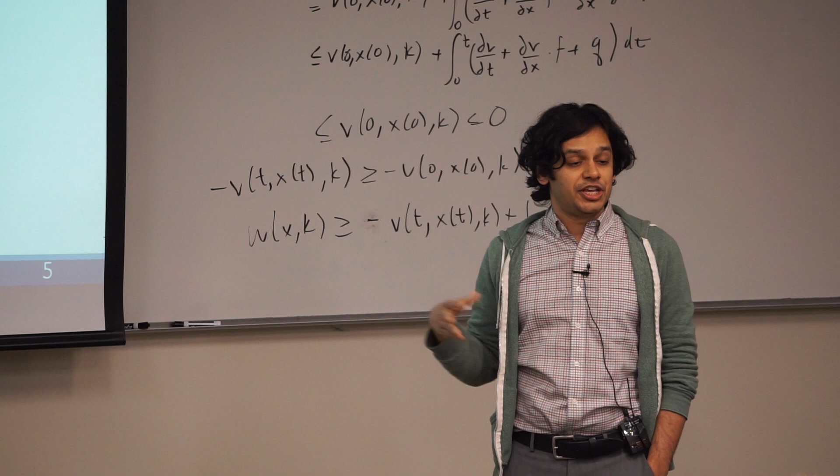We've done a lot of work on building data sets where we perturb people while they're doing real motion. I think this is my student Patrick, and he's walking around. We've attached cables to Patrick and we're perturbing him, seeing how much of a perturbation he can tolerate. We try to understand how stable a person is by using control theoretic concepts like a region of attraction. We've developed techniques that can generate a region of attraction for different types of locomotion.

Recently we've shown that these regions of attraction actually coincide with just how stable someone is. If we perturb them, we can predict what level and type of perturbation corresponds to them having to use a different control strategy. It's been shown in the literature that having to switch arbitrarily between different control strategies typically corresponds to a higher likelihood of falling.

The last thing, and this is an area I hope to get more into, is translating these ideas of region of attraction into actually doing control design for prosthesis and orthotics. We have not done too much exploration here, but it's an area we're looking to get into more and more. The other area that we do lots of work in is the automated and connected vehicles domain.

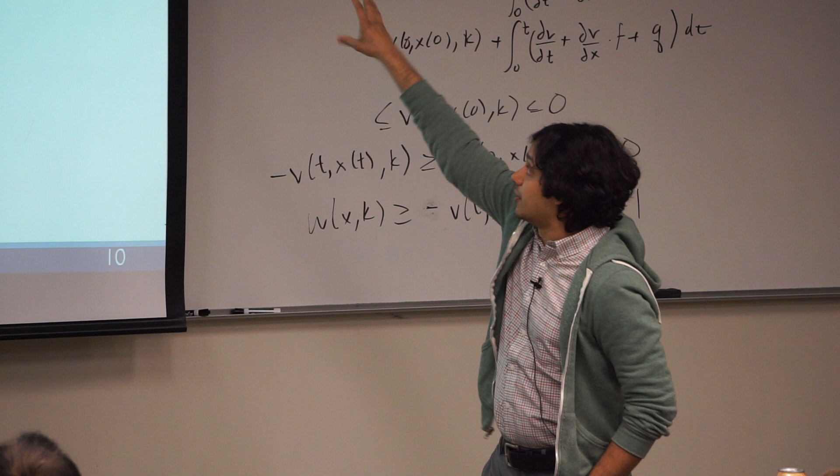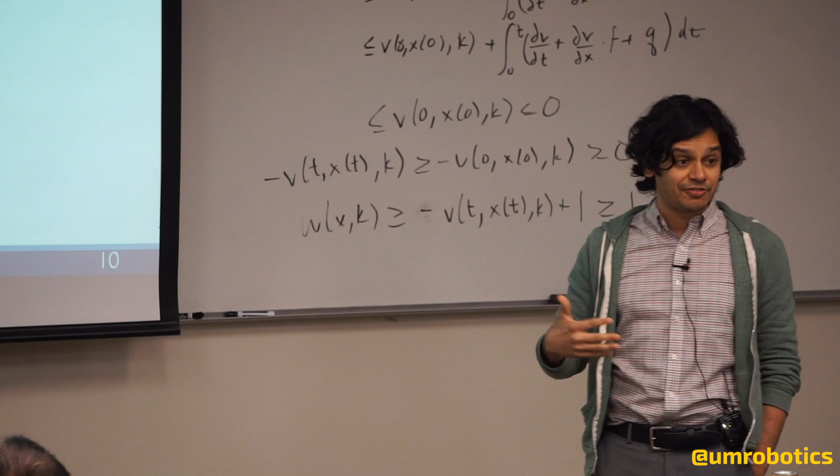The other things we've done is actually look at sort of estimation problems. Typically people think of estimation in automated vehicles and they think of things like SLAM. That's great. One of the things we've actually done is use windshield wipers, for instance, to estimate rainfall rates. And this is with collaborators Matt Bartos and Branko Kerkez and Hyongju Park.

What we've done is shown in Ann Arbor using instrumented vehicles that we can improve the accuracy of rainfall prediction, so much so that we can now try to control water networks and whatnot. My colleague here, Branko Kerkez, can talk about that at great length. It's a really cool way to leverage automated vehicles in a way that people don't nominally think about. So it's really cool work.

And the last thing we think a lot about in my group is actually driving. And Michigan presents a really interesting challenge when it comes to driving.

So you'll notice none of these people up here are actually from Michigan. This is my first time in Michigan. As James said, I came here from Berkeley, and I grew up in Southern California. My first time in Michigan was in Sault Ste. Marie in February in 2011. What we were doing back then was trying to drive this Jag at really high speeds on ice and use MPC to do lane change maneuvers and whatnot. It's really hard. And frankly, it was super cold. They had me standing outside recording this, and I can still remember that.

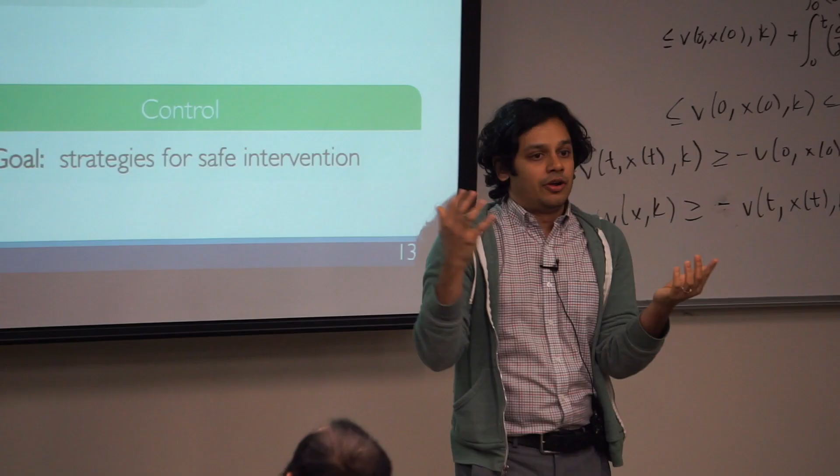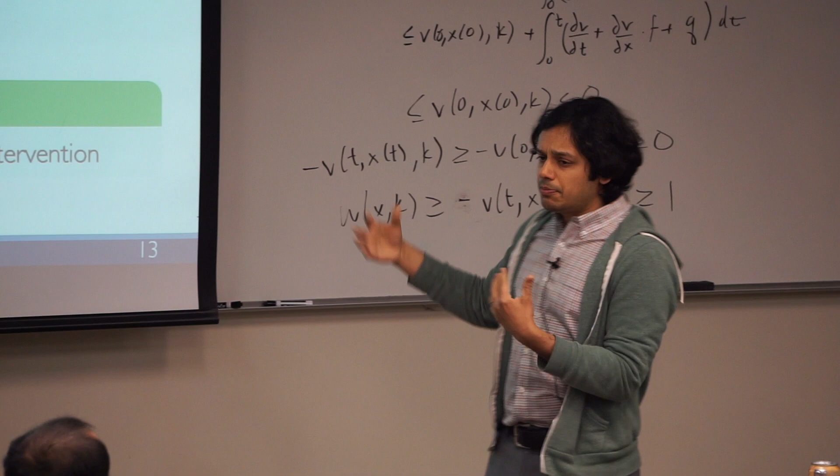But in particular, my group is really excited about this strategy where we translate all of these different types of problems into infinite dimensions. What do I mean by that? We can represent our dynamics as linear in an infinite dimensional state space representation for a system. And when it comes to nonlinear programming, for example, if I'm trying to do control design using model predictive control with a nonlinear system, that can be really hard to solve in practice because I have to solve a nonlinear program. But what we've been able to do is, by lifting, translate these problems into convex programs that have nice properties in terms of approximation and whatnot. So I'll talk about that today.

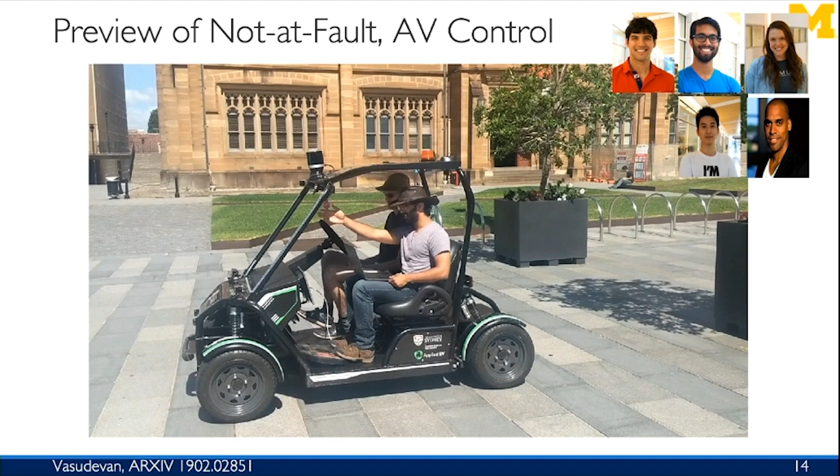The areas I'm really going to speak about are these ideas of trying to do not at fault autonomous vehicle control. And I'm not a jerk like my advisors are. I let my students go to Sydney and control a self-driving car down there. What they're doing now is driving this vehicle in and around the Sydney campus. You'll notice there are people around, and it's doing all of the control in a provably not at fault way, and I'll talk about what that means, without requiring any human intervention, all on the platform itself. And it's doing all the sensing, everything online.

Hopefully I will also get to talk about some work we've been doing in data-driven control on soft robots. Here we're collecting lots of data, building models in infinite dimensions that translate into a linear representation that allows us to do things like model predictive control, even though the models for these soft robots and their construction can make them really nonlinear. So hopefully I'll get here. Chances are not looking great, considering I have about 90 slides, but we'll see.

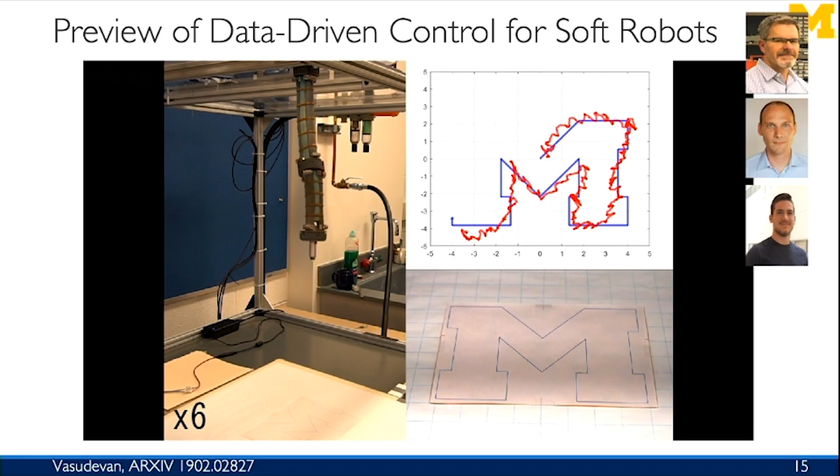OK. So that's going to be sort of an outline for my talk. I'm going to start off by talking about reachability-based trajectory design in order to design provably safe real-time control for autonomous vehicles.

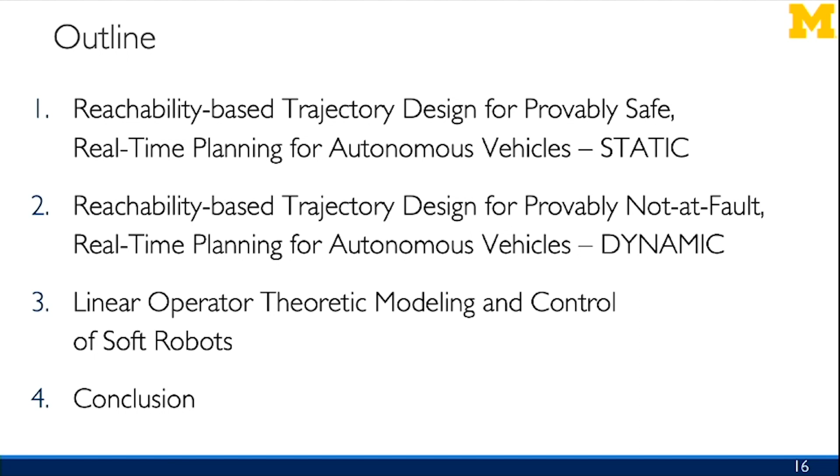We'll start off with the static case, where everything in the world is not moving. And then we'll jump into the dynamic case. And then hopefully we'll get into the soft robot stuff. By the way, if you have questions, interrupt away.

Our colleagues in the Auto Lab can build really nice models of vehicles that are really high dimensional, really nonlinear, and hard to grapple with in real time in a way that allows us to say anything about safety. On the other hand, there are really simplistic models of a vehicle, where I model the car as a double integrator. That model is really simple, but the trade-off is it doesn't really represent the true dynamics of the vehicle. Our goal is to understand where we want to live along that spectrum. Making a choice necessarily forces us to decide we're losing something in terms of model fidelity.

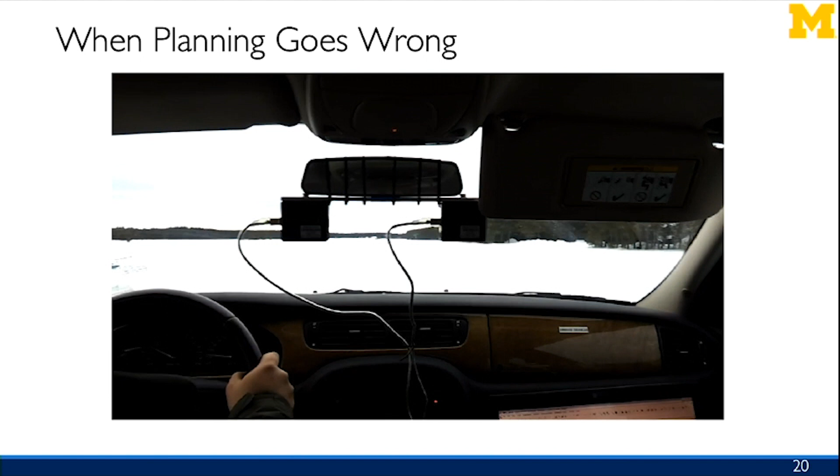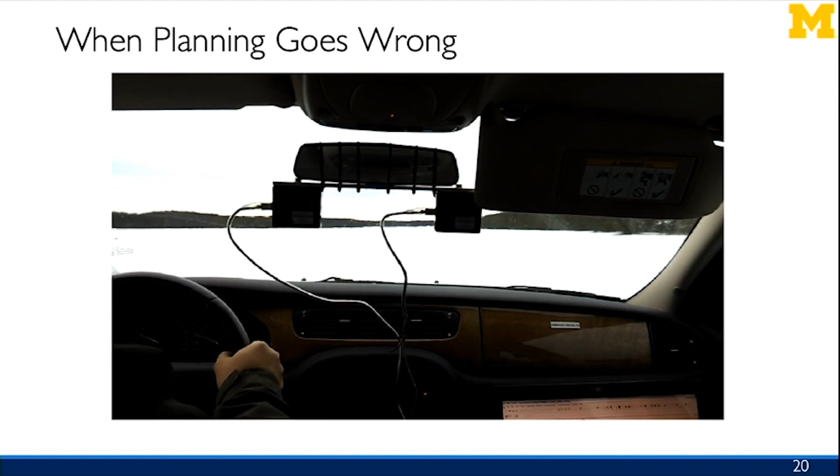You can hear the wind. This is when it's less great. And I apologize for the cursing in advance. This is me sitting in the back of the car. By the way, the person sitting in the front of the car here is actually one of the designers of the Tesla Autopilot. It's a fun, fun story. You'll see our safety driver is holding on for dear life. He trusts us. And that's us crashing the car.

So in practice, you can do really incredible things with things like model predictive control. But in practice, being able to verify that it's going to operate safely is a really hard challenge for us. And what we want to do is develop techniques that we can verify are actually going to behave correctly when we generate them.

There's a really rich problem here. Lots of people, including many at Michigan, have been thinking about this problem. My students have this nice breakdown of the different approaches. The first set of methods they call check methods. The way these check methods work is that you pre-design a trajectory or a family of trajectories, and you check at runtime if that pre-computed trajectory is actually safe.

The way these techniques work typically is by using zonotope methods, where you propagate uncertainty about the nominal trajectory you've designed. This is really great, and you can do cool things in terms of verifying that a trajectory is safe at runtime. The challenge is if your trajectories are not rich enough, you really can't say very much about safety. For instance, as you're driving along, if your library is not rich enough, and all 5 of your trajectories are unsafe, you'd have no idea what to do. In practice, that can be really problematic.

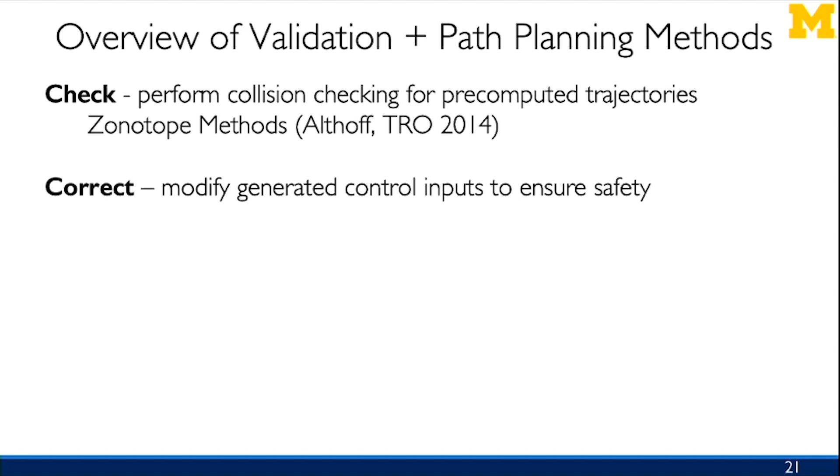On the other hand, there are these other approaches that we'll call correct approaches. What they try to do is modify a generated control input at runtime in order to ensure it can behave safely. There's a variety of different techniques that try to do this.

I'll refer to this really nice lit review by Ilya. You guys should check it out. It's called Reference Governors. Reference governors have been developed here - Gilbert, for example, has done really amazing work, and his students as well have done great work in this area.

The idea is that, as I'm running my system forward, suppose I apply a reference control input or a reference trajectory that I want to try and track. What these methods do is figure out a way to correct that trajectory at runtime in order to ensure safe behavior. The challenge here is that generalizing these approaches to nonlinear systems can be hard, and in practice trying to do this for arbitrary situations can be a bit difficult. Although I'll say that this approach is really, really rich.

There are really great things you can do with it, as I'll show you later in my talk. Jessy, Necmiye, and many others, Huei Peng and his students, have taken these ideas associated with control barrier functions and done really amazing work when it comes to things like adaptive cruise control and lane keeping. The idea here is that you modify a trajectory at runtime, or modify an input at runtime, in order to ensure safety. These approaches tend to work in specific situations, although there have been nice ways to try to generalize this.

Yuxiao Chen, who graduated I think a year ago, has been doing some really cool work where he has tried to generalize this type of approach to arbitrary path planning. The translation typically turns into an integer linear program, and that can be really hard to execute at runtime, where the environment may be changing, et cetera.

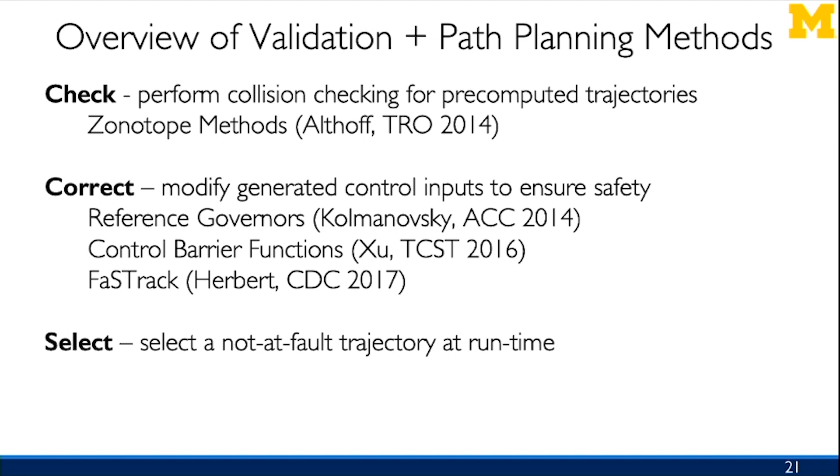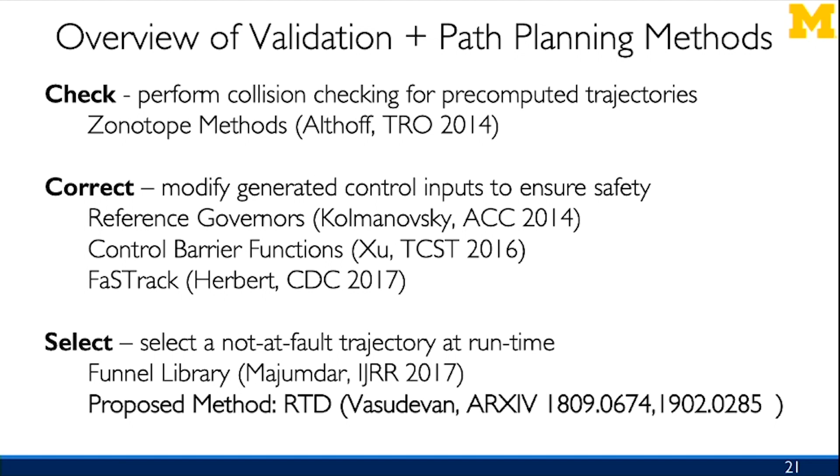The last set of approaches are what I'll call select. What these try to do is, instead of correcting a trajectory, they select a trajectory that they know at runtime is going to be safe. The ways these can work, for instance, can be by having a finite set of trajectories and checking one of them at a time, or an approach my students have developed, which we call reachability-based trajectory design. It's a really cool idea, and that's what I'm going to talk about next. The idea is that you have a family of trajectories, and you're actually able to say something about provably being safe and always being persistently feasible, in a way that's actually useful, so you can say something about safety.

How does it work? Let's start off with an example - and again, this is just an example. As we'll see, this approach will generalize quite well. So if I look at vehicle dynamics, they look really, really nasty. This is a really simple model of a vehicle that Gabor Orosz, for example, could probably talk about and teach about at great length. What I'll mention quickly is that these tire forces written down here are tremendously nonlinear and are really, really nasty.

In practice, it's really hard to describe or apply methods to speak about safety for this class of systems. What we want to do is design control inputs that ensure this can operate safely at runtime. The important thing to keep in mind is that our obstacles, or things we want to avoid, are typically only represented by our first three states.

Our first three states are our position in the world. In a 2D world, it would just be our x and y position and our heading. What my students realized is that this is a really complex model, but safety in this instance can be boiled down to just thinking about those first three states.

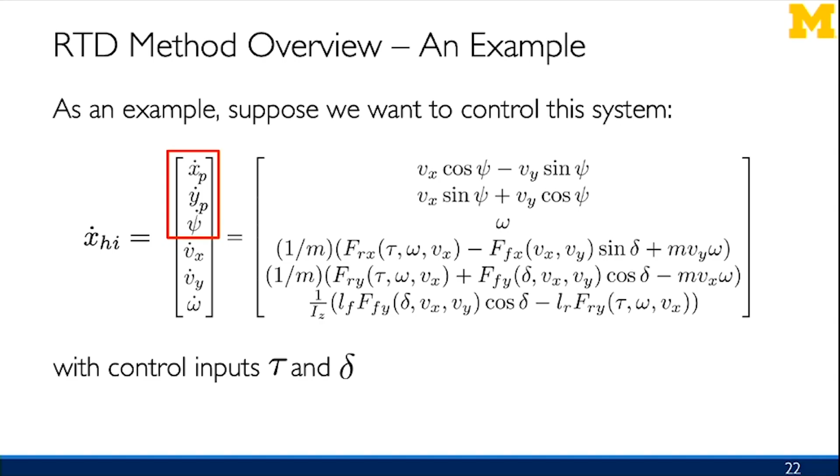What they thought is, why don't we just drop the rest of the dynamics and instead think of our system as just a simple kinematic model? Well, in that instance, you're giving up a heck of a lot.

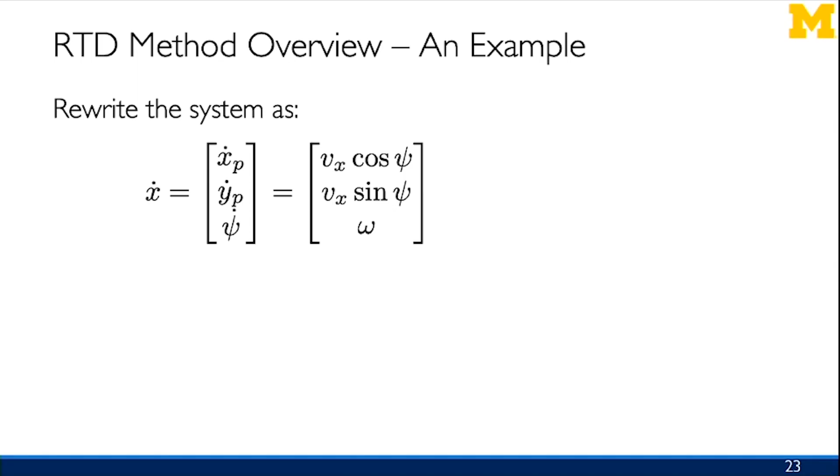Obviously, a kinematic model and a dynamic model are not the same at all. But they can be related to one another, and the way we'll relate them is by introducing a term in a second.

Before I do that, I should mention that this velocity and omega, we're going to treat those as trajectory parameters. To save myself some space, you can think of them as some gains being selected from some trajectory parameter space.

The way we're going to try to model the difference between this kinematic model and that more complex model is by introducing a term I'm going to call the disturbance term. This disturbance term is essentially going to describe the gap between that dynamic model and that kinematic model, and in order to describe that gap, it needs to satisfy this assumption.

What this assumption is saying is that over a certain time horizon, from 0 to capital T, we can bound the difference between the high fidelity model and this simple kinematic model according to this inequality.

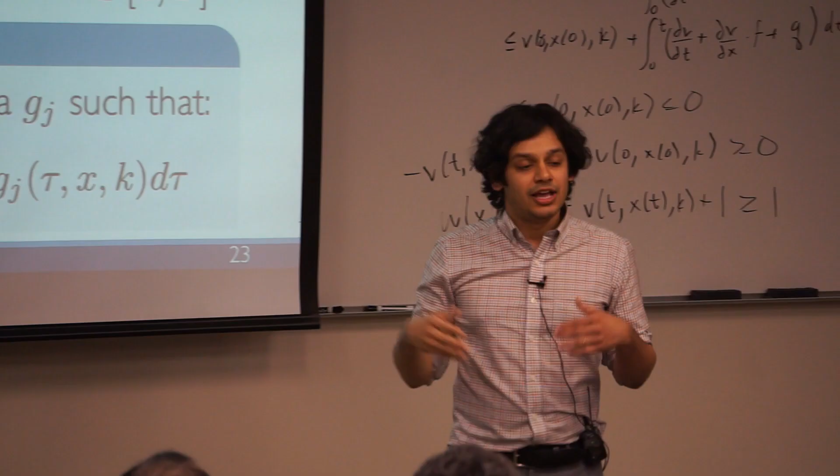If we can construct this G to satisfy this inequality, this dynamical system with disturbances drawn between -1 and 1 as a function of time can actually describe the gap between this low-dimensional system and the high-dimensional system. What I mean is that this low-dimensional system, with a selection of a disturbance input, is capable of describing the behavior of that high-fidelity model.

So in practice, this much simpler model is capable of accounting for the difference between that high-fidelity system and the low-fidelity system, and we'll see how we can leverage that in a moment.

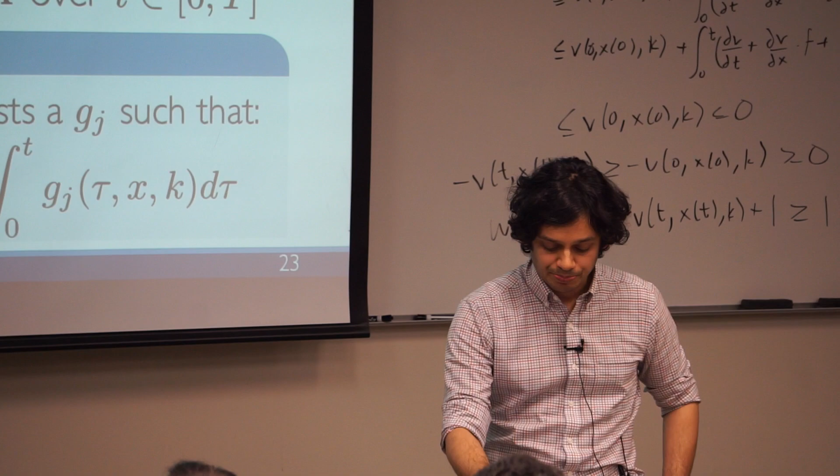Okay, so let's come back to this picture. This is our state space X. This is our initial vehicle set, so this is our initial position of the vehicle. Suppose it's continually moving along.

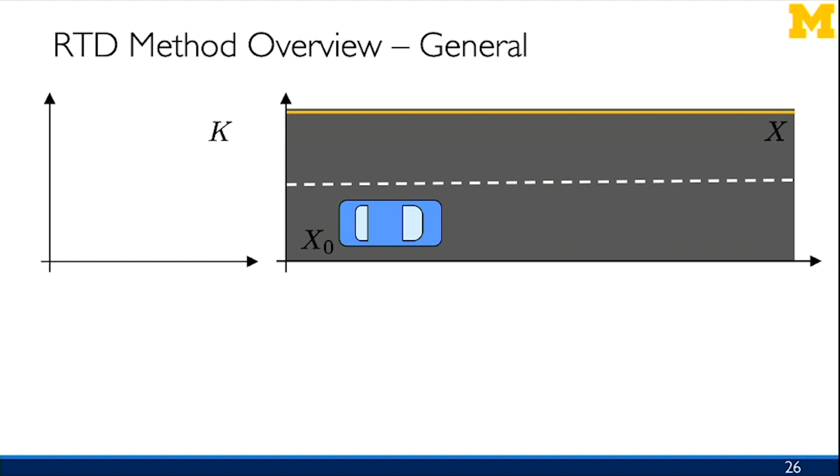And what we have are a set of trajectory parameters, drawn from this space capital K. In practice, if I search over all possible Ks, what I'm left with is this sort of bell-shaped curve of all of the possible trajectories for that simple kinematic system.

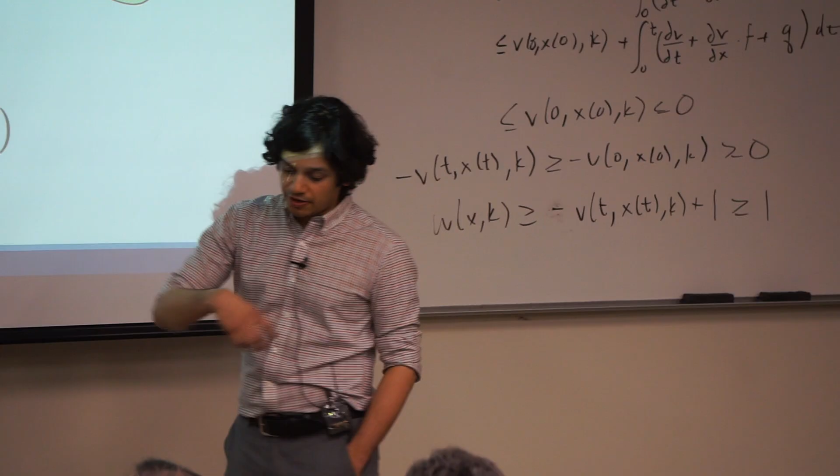So in practice, we have our simple kinematic system, but now we add in a disturbance. What this disturbance is doing is describing sort of a volume of possible trajectories for that low-dimensional system as I carve out all possible disturbances d of t.

And in practice, what that volume is describing is all possible outcomes described by that low-dimensional system, one of which contains the behavior of the high-fidelity system.

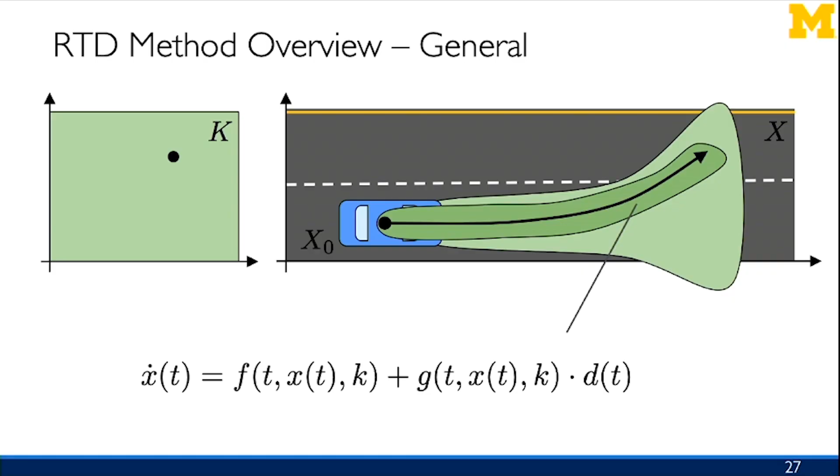So if we go back to this drawing, what that means for us is if I pick something over here, okay, and maybe this is some obstacle, that obstacle is going to map to a set of trajectory parameters on the left-hand side.

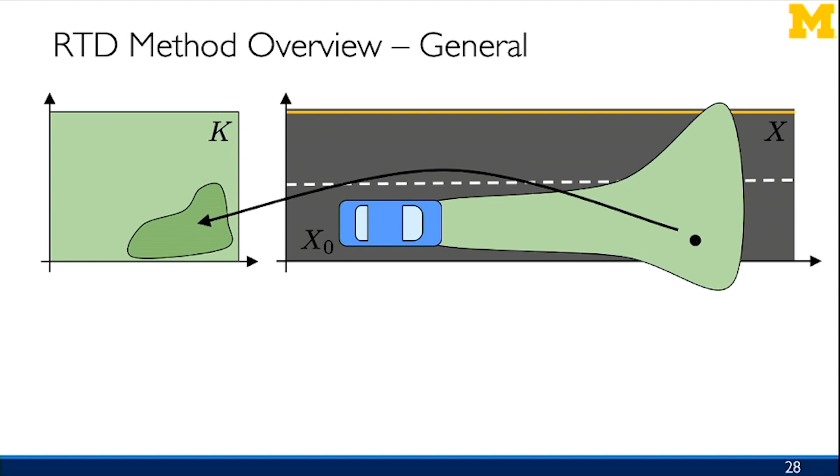And in fact, being able to speak about safety can be described as just figuring out which set of trajectory parameters actually are unsafe, because of this projection backwards from this set in the state space to the trajectory parameter space.

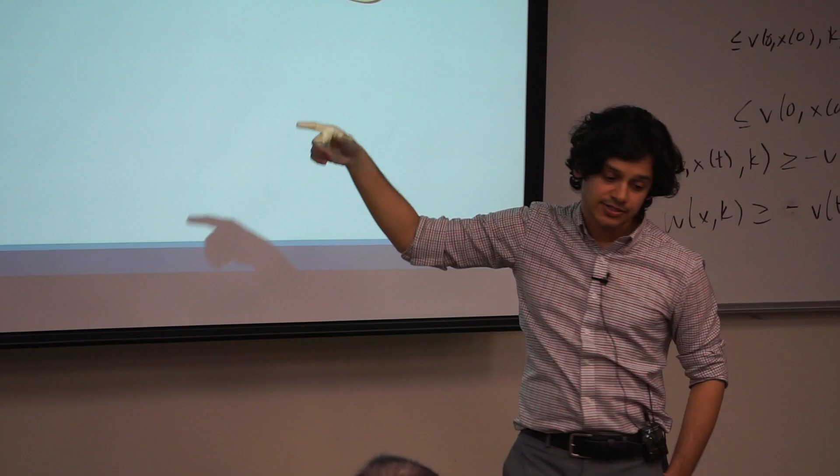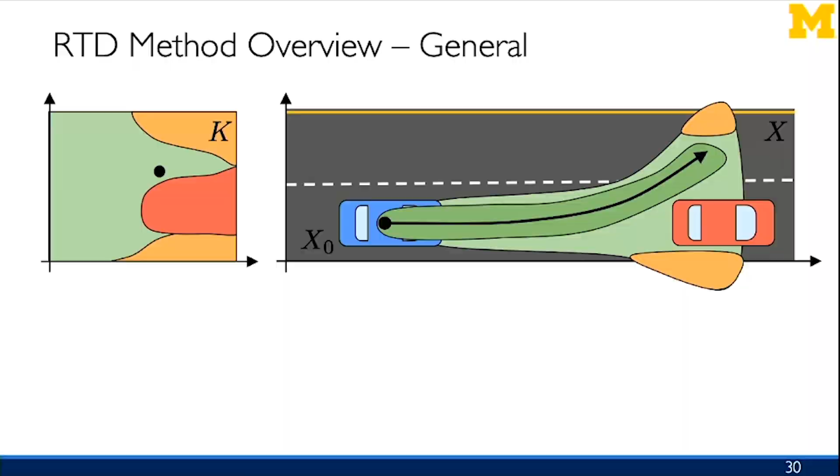So what we want to be able to do at runtime is select trajectories that stay out of those unsafe trajectory parameters, and be able to manage that set in a way that allows us to do online planning. Okay, so that's what we're going to describe.

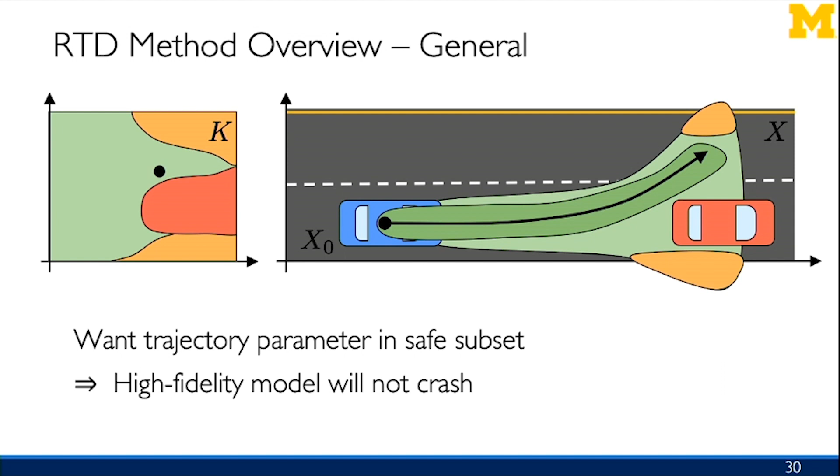If we do this, by the way, because of the way this disturbance input is selected and because of the way that assumption is formulated, this ensures that the high fidelity model will not actually crash at all.

Okay, so what are we going to do? I'm going to step through 3 tasks. The first task is computing the forward reachable set of the system, and we're going to do that offline. Once we have that offline representation, it'll allow us to describe the set of safe and unsafe trajectory parameters in an online fashion, as I'll describe in a second. The last bit is, in order to ensure persistent feasibility, that the car will never run into anything, we need to ensure that we can actually select the time horizon correctly, and I'll describe that process at the end.

Everyone with me so far? Any questions?

It's very hot in here.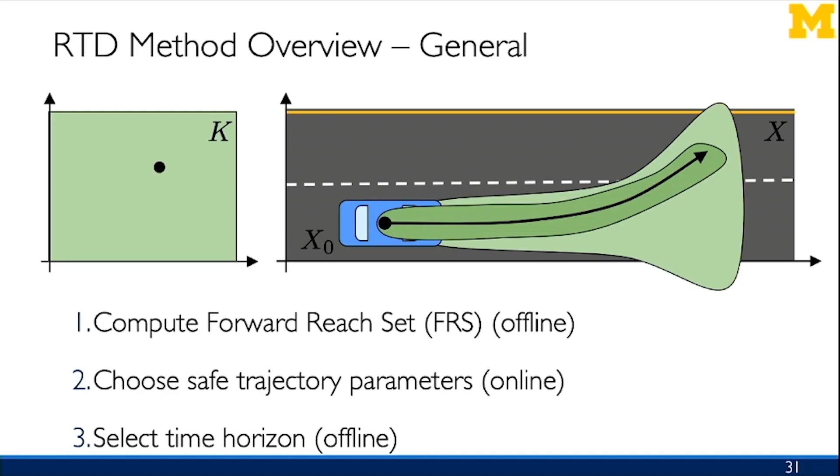Okay, so the first bit is we're going to describe how to compute the forward reachable set, and this is where the infinite dimensional perspective will appear. In particular, what we're going to do in order to compute the forward reachable set of the system is perform an optimization over functions. It'll turn out that this optimization over functions will be a linear program over functions. But since we're optimizing over the space of functions, it'll actually be an infinite dimensional linear program.

So the first part of this optimization problem is we have V, W, and Q. V, W, and Q are going to correspond to the functions that we're optimizing over. In our cost function we try to minimize the volume of W, and that d lambda corresponds to the Lebesgue integral in this instance. What we're going to show is that W at x of k converges to the indicator function on the forward reachable set, and I'll show you how that works in a second.

In order to do that, we're going to have a litany of constraints. Okay, and this is where we can flip over to this writing here on the right-hand side. So what are these constraints doing? In fact, these constraints are writing down a Lyapunov function for us. And in order to understand that, let's start off by looking at v.

So v is a function that, by the fundamental theorem of calculus, I can write down its flow along trajectories of the system using this equality. The next line here is just me taking this total derivative and describing it in terms of these partial derivatives. The next line here is actually the first time I'm using one of the constraints that's written down here.

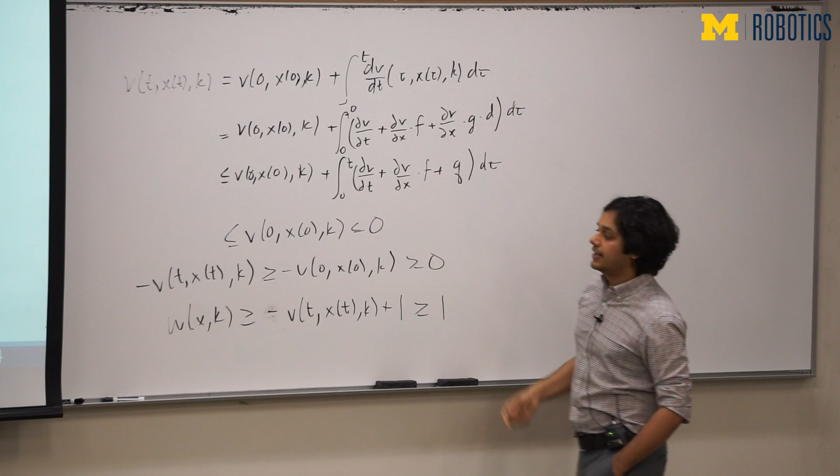The last line here is using the first equality up here and this bottom inequality down here. So what this is telling me is that along flows of my system, I have this inequality being satisfied, for an arbitrary initial condition and an arbitrary time along that trajectory. So what I'm getting is the forward reachable set described as a level set of a system by selecting a particular value of k. For each selection of k, I'm describing what the flow of the system is by using this level set object.

And in particular, again, v is acting like a Lyapunov function. It decreases along trajectories of the system. And in fact, that last constraint allows me to describe the entire forward reachable set just by using w. And that's what that inequality down there is doing.

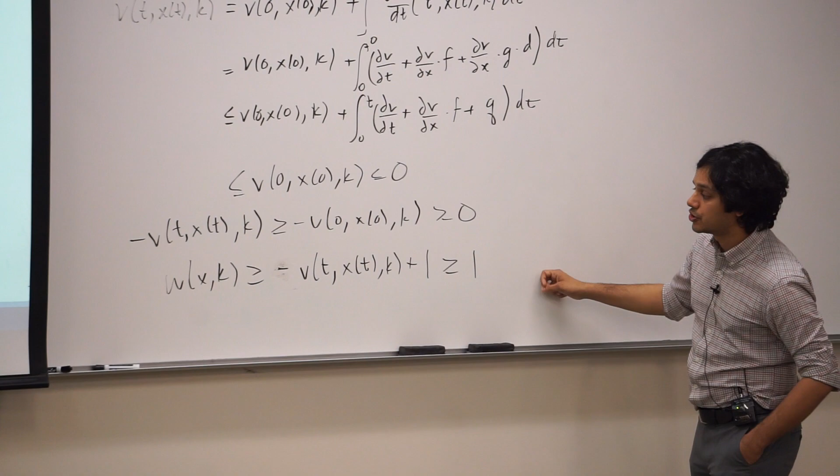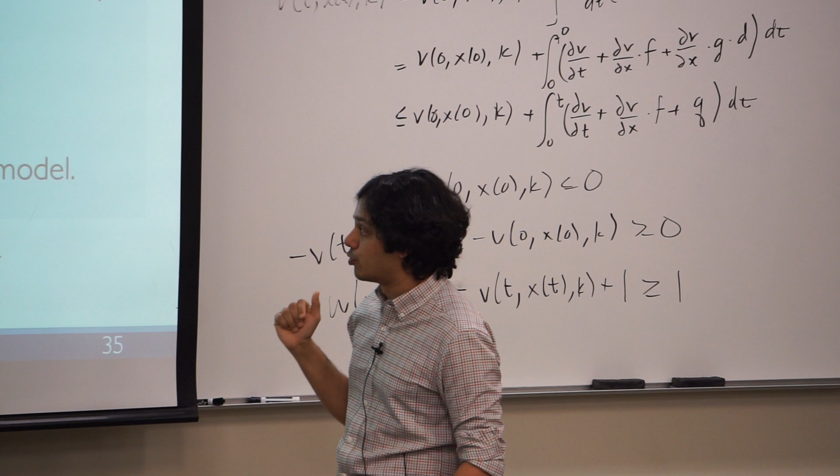As a result, what we can show is, in fact, a solution - and by the way, it's a linear program, I can show you why in a second - the solution to this linear program is going to generate a w such that, for any selection of k, this value of w being greater than or equal to 1 corresponds to an element that can be reached by our system by that selection of k. In other words, the one super level set of w contains the forward reachable set of the high fidelity system because of the way the disturbance is defined.

By the way, why is this a linear program? Each of these constraints in here is a linear constraint. It's pointwise. And that's kind of the difficulty with this problem - I actually need to enforce all of these constraints over an entire set. And in fact, that set is what's going to create a nightmare for us.

Okay, the good news, and I won't cover it here but it's tremendously interesting, is that for certain classes of dynamics - polynomial, rational, trigonometric, and you can generalize this a bit more - there exists a sequence of semi-definite programs with vanishing conservatism that actually solve this linear program.

And what we can prove is that the solution to any of these SDPs is a polynomial function W whose one super level set for each k contains the FRS under k. So what that's meant to say is the following.

So let's go back to this picture. This is my state space of my world, these are my trajectory parameters. Suppose I have an obstacle that appears here on the right. What I know is that the one super level set of W associated with all possible values of x1 that make this greater than or equal to 1, this object is going to contain the set of trajectory parameters that can actually intersect with x1 starting from that initial condition set.

So as I vary these obstacles that exist on the right-hand side, I'm generating these one super level sets on the left-hand side that actually describe the unsafe trajectory parameters. And in fact, it's an outer approximation to it.

Yes? Did you just use the convex hull of the object? So back here, use the convex hull. Convex hull of the original object, that would reduce the number of points you need. Also, it would include every plan. Yeah, so at the end of the day, even if I used a convex hull of this obstacle, I would still need to figure out what the unsafe trajectory parameters are, right? And in that instance, I'd still need to represent the obstacle as an optimization problem over my trajectory parameter space, and that's still not easy to do. Good question.

OK, so if you're interested in the details, by the way, please do take a look at this paper. It's like 50 pages long, but most of it is literally describing this algorithmic procedure to actually discretize an obstacle in a way that you can provably ensure is safe. The last step here is we wanted to actually ensure that we can construct a planner that can use this type of representation in a way where we can make guarantees about safety. And in order to do that, we need to select the time horizon over where we're actually constructing the forward reachable set. In order to do that, we make two additional assumptions.

The first is that we have a bounded amount of time to do our planning. It's not really an assumption, it's life, right? And the last thing is, we want to assume that there's a maximum possible stopping time. And what I mean here is that there's a maximum possible stopping distance, and that can translate by doing some arithmetic into a stopping time. And if we use these two assumptions, the way that we want to do planning now is that I'm performing planning in a receding horizon way. So while I'm applying the plan that I generated previously, I'm generating the new plan that I'll apply when I arrive at that location tau plan away.

Okay, so what may happen as I'm operating my vehicle is because I'm solving some optimization problem, after tau plan, I may not actually find a solution. So in order to ensure that we don't run into any problems, we want to make sure that we have enough stopping distance. Okay, and that's going to set a lower bound on what our time horizon over which we can generate this forward reachable set, or how big the forward reachable set has to be in time.

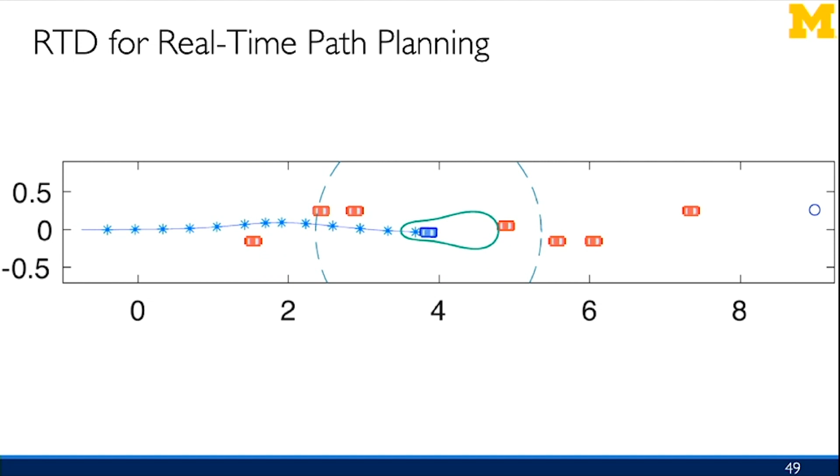OK, so this is fun. This is it working in simulation. OK, we'll get up to real examples, I promise you. What we wanted to try to do is I wanted to be convinced that this wasn't conservative. The reason is we're making a pretty strong assumption here, which is we're simplifying our model, representing this really complicated vehicle model using a really simplistic one and introducing that gigantic G function that could introduce a lot of uncertainty.

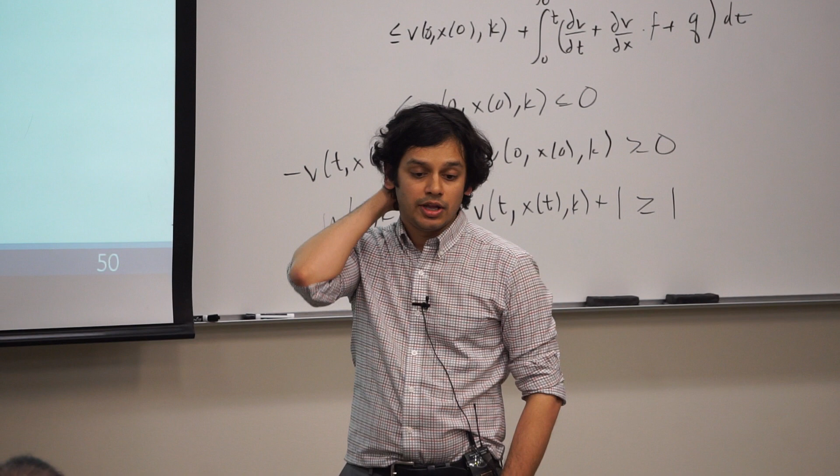So in order to do that, we wanted to do a comparison. And the two comparisons we could think of were RRTs, because that's what a whole community does, and another one, which is nonlinear model predictive control. And in fact, in this instance, there's beautiful libraries available out there. We didn't want to write our own. So we used one called GPOPS that uses pseudospectral collocation in order to generate an optimization problem that it can solve in order to do this type of optimization.

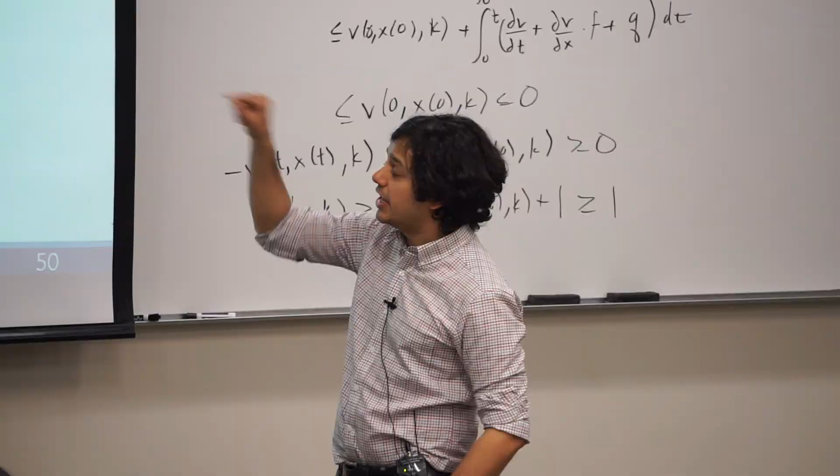In any case, each of these methods also discretizes time in a sense. And because they discretize time, they also need to have a buffer around their obstacle in order to really say something about safety. So what we wanted to do was figure out what the right size buffer would be for these types of planners so that they can get the best performance that they can. So what we did was run all of these planners in arbitrary worlds where we varied the buffer size without any real-time constraint. And what we verified are the number of goals that they reached, because we had a final location that they had to arrive at. And what we wanted to evaluate were the number of crashes they had while doing it.

Okay, and the results are not too surprising. As I increase my buffer size, the world starts becoming like a maze, and I can't get out of the maze. So I can't get to the goal, but the benefit here is that I don't crash while doing it. Right? So it makes sense that the number of goals decreases as the buffer size increases, but the number of crashes also decreases, right?

Now, in fact, what I'll argue for just a moment is that basically this is what a lot of self-driving car companies are really doing at the moment, which is that they're buffering obstacles to be really, really large, to ensure that they don't actually run into anything. And the penalty that they pay is a non-trivial one. They drive really, really slowly. And again, you may be comfortable with that. I would rather drive down Plymouth at like 100 miles per hour if possible, right?

OK. So what we did was do an evaluation. And we took the best buffer size that we generated from the previous one. What was it, Trace? Do you remember? 0.45? Yeah. OK. And we gave that to RRT and nonlinear model predictive control. And then we set our tau plan to half a second. We had a sensing horizon of 4 meters. And then we ran our planners in a simulated world across a bunch of different obstacle courses. And what we saw is that our planner wasn't that conservative. We could still ensure that we didn't crash, which is great.

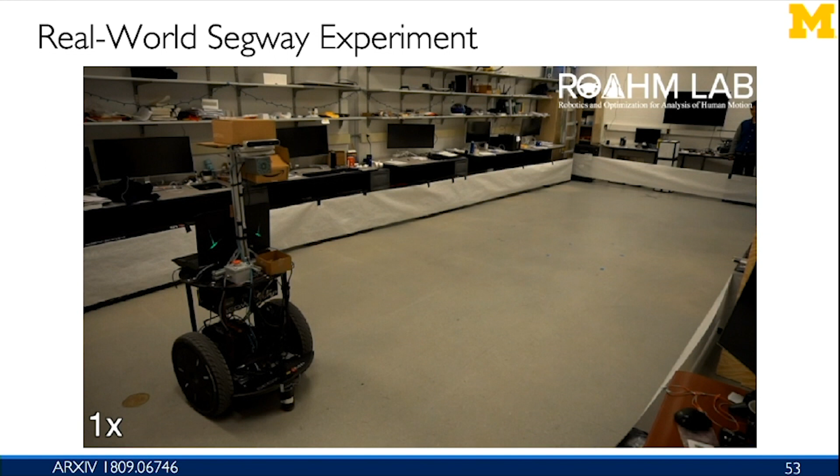Let's start showing some videos. So I said, great, let's try to get this to work in my lab. And hopefully this will start playing. Each clip is a single take because I want to convince you that the worlds are really random, okay, that I'm not fooling with you. And I forced my students to tape this like an Iñárritu movie, so it's like Birdman. Everything is one shot, okay? And nothing is known. Everything is planned on board. And you'll see this thing running back and forth. And I think they'll walk you through what this is. But let me skip ahead a little bit.

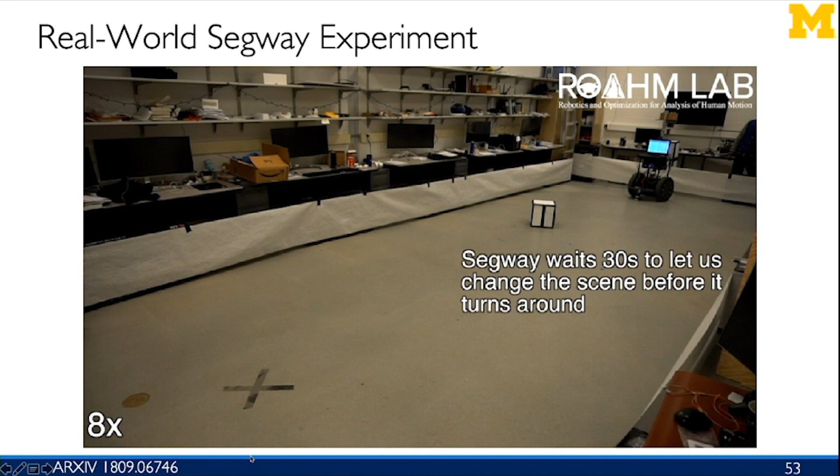Okay, and what you're going to see is that they're just going to start throwing obstacles. And you'll notice this is like a 5-minute movie. It's available on the website, by the way. But what we wanted to show is that, again, we could just keep running this thing over and over and over and just keep throwing obstacles.

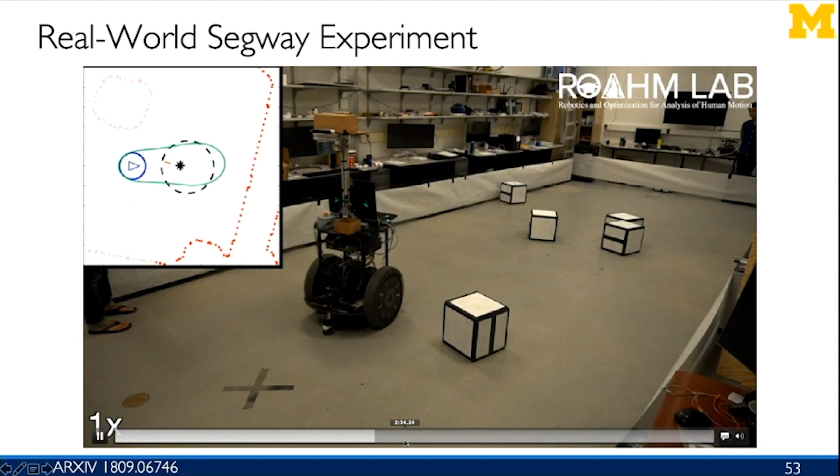And again, we wanted to show that the robot is actually operating at real time, 1x. In fact, the world's generation is what's taking 16x. It's kind of the opposite of the way that most robotics videos work at the moment. Okay, and I'll sort of skip ahead here, but you'll see that they'll start getting really mean, start throwing lots and lots more obstacles. And again, everything is random. And if you're really interested in this video, please do take a look at our website.

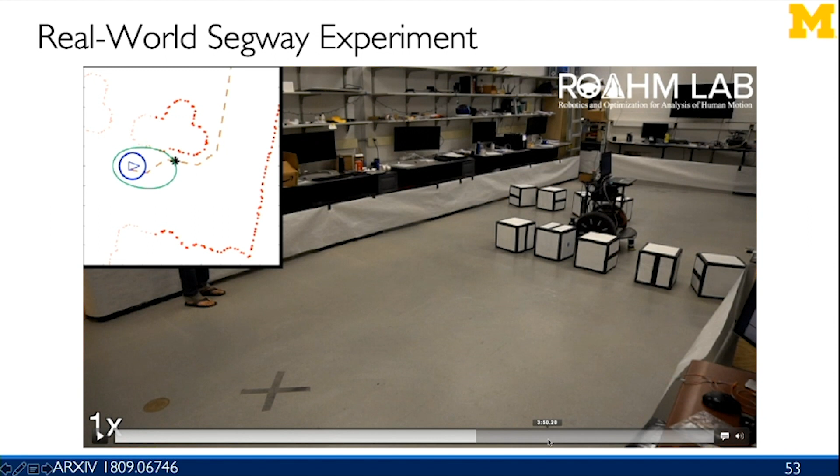Okay, and at the end, they start getting less random because they wanted to show, hey, does this actually work in a structured way? They start getting even more sort of bold. They put themselves in the video. They seem to believe that they're bulletproof. Okay. And again, it's planning everything on board the vehicle. You can see that they really believe in their planner.

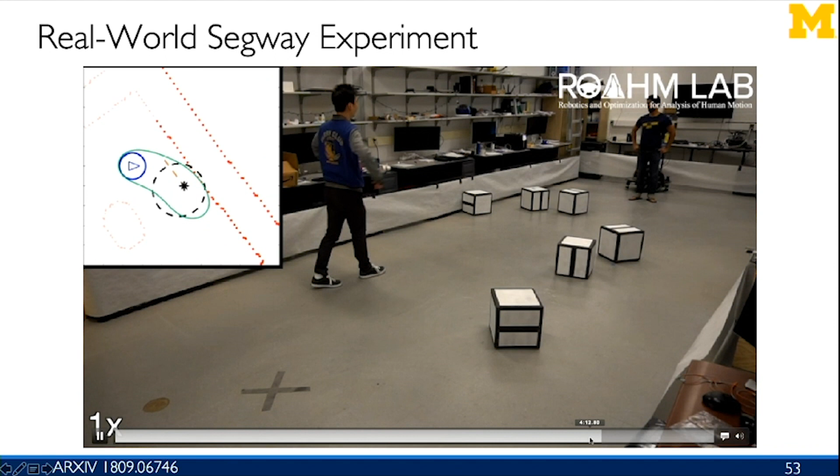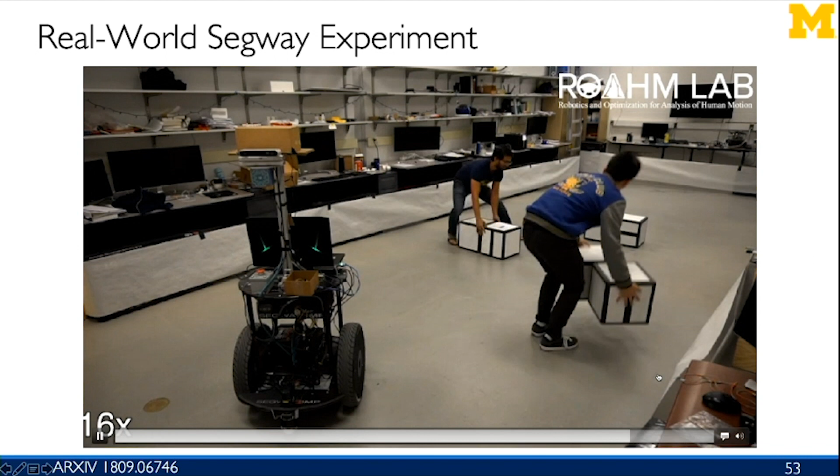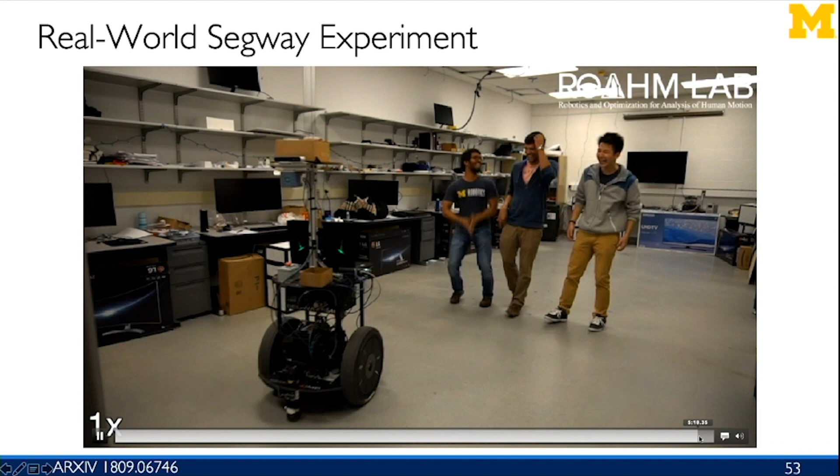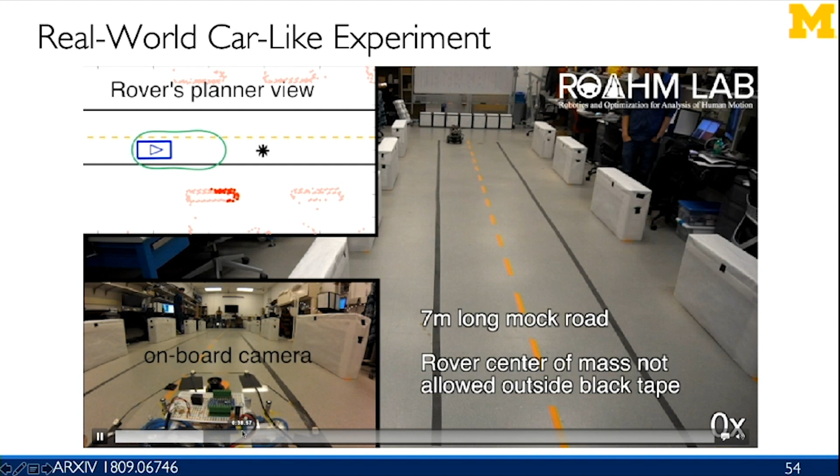Then I said, great, let's actually throw this on a CarSim Fusion model that actually is representative of the AV platform that we, as a group, have access to. And so what we wanted to do is run this model with this Ford Fusion model out at MCity, but in a virtual version of MCity, because we're still working on trying to translate this onto a hardware platform, which is, I think, our summer project.

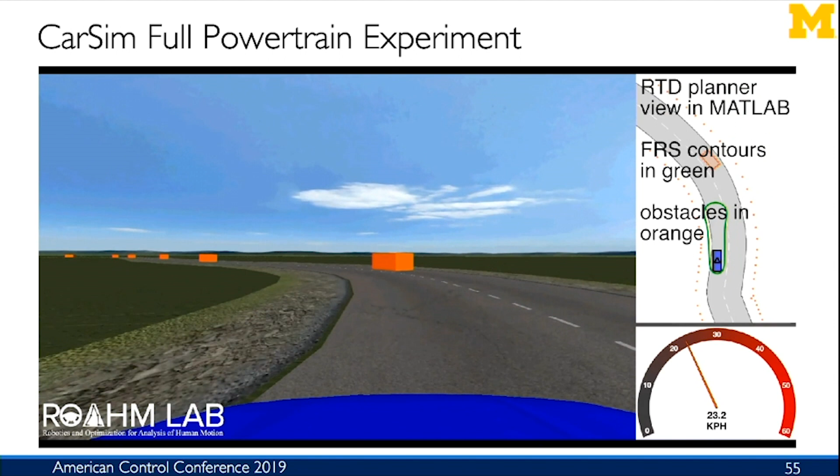And you'll see, I think the speed limit out at MCity on this outer loop is about 60 kilometers per hour, and we're placing obstacles basically at the limit of trying to get up to that speed. And it'll do fun stuff. And again, it's doing all the obstacle avoidance in a provably safe way, discretizing everything in a way where we can actually ensure that things will work out nicely, et cetera.

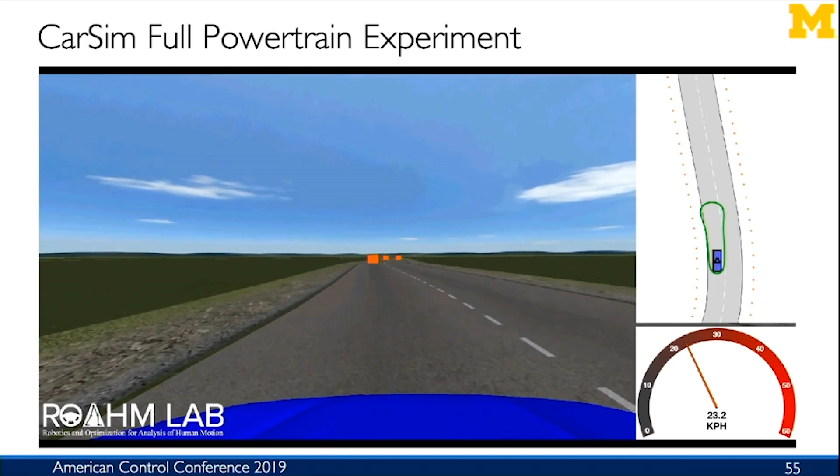And I think, again... How did you verify that your G function was correct when you changed platforms here? Yeah, so that had to be hard. So fantastic question. The simulator might have 200 states, right, in that model? Yeah, so in practice, it's a really great question. What I know, and what we need to do as we move forward, is build a better way to build that G function.

What we do at the moment is basically sampling, and we try to sample our system over an arbitrary, really large number of states, let that run on a GPU over a really long period of time, and then try to bound the difference between what our low fidelity model says and our high fidelity model says. That's hard to do, I agree with you.

We're working on techniques to make that more accessible by literally taking in the high fidelity model, bounding parameters inside of it directly, like the friction cone, and introducing that in a way where we can construct that G function directly. There are also sums of squares based techniques to try to do this, but I'll spare you the sums of squares nonsense for a moment.

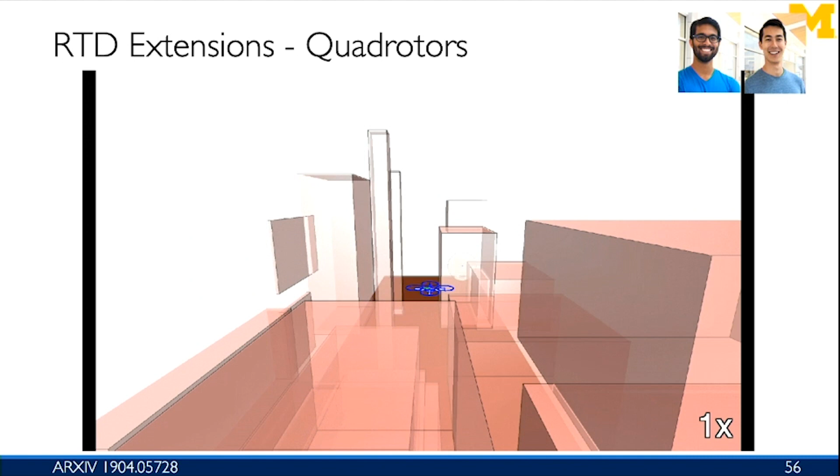Just building up on that question, if you're assuming that you already have access to, in this case, a 6-dimensional model, you're truncating that to a 3-dimensional model. What if the 6-dimensional model itself is not represented in the vehicle? Totally. So let me repeat the question. If the 6-dimensional model isn't actually representing the true behavior of the system, how do you actually ensure that you can bound safety? That's a really great question.

Again, at the end of the day, the ways that car companies are thinking about verifying the models that they construct is running them. So at the end of the day, they go out. Part of the experience that I had at Sault Ste. Marie was that they put the car inside of a really, really low temperature fridge, and actually ran the vehicle forward and tested different types of parameters inside of the system in order to construct a reasonable representation of the system.

I'm not saying that that disappears from the story. What I'm saying is that when we take that model and the uncertainty we have with it, we can actually incorporate that in a meaningful way while doing our planning.

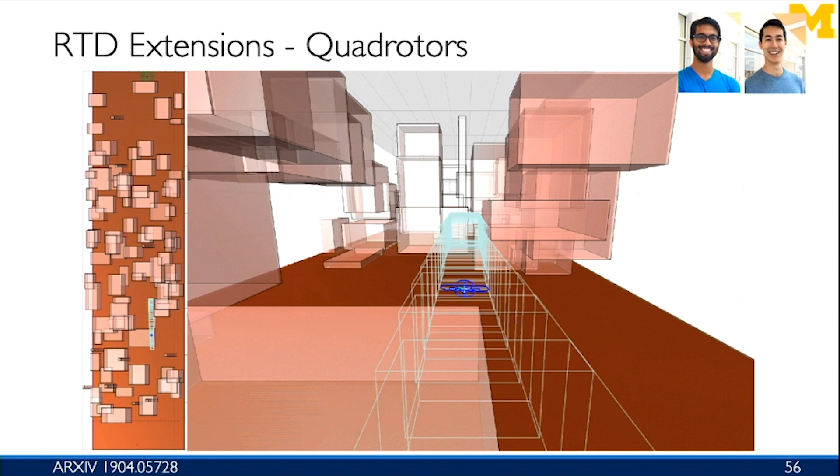We can also do this with quad rotors. In this instance, this is a 13-dimensional representation of the system. We are not creating a low-dimensional model with just 3 or 4 states—we're actually using the full 13-dimensional model. This is cool, and we're using a slightly different way to compute the forward reachable set, but it's more or less similar.

We can do this with walking robots too. We're getting closer to trying to translate this onto Cassie, which is in my lab. In this instance, we have a representation of the safe region for this system, and we're selecting trajectory parameters that correspond to the gait library that Jessy's group has been developing, optimizing over that safe gait library space to ensure we can follow paths in a way that ensures the robot doesn't fall over.

We've also done this formulation looking at it more like a reference governor, where we're computing something that looks like the viability kernel for these walking robots. Instead of always selecting from a safe set of trajectory parameters, we're instead correcting them, like I described in my related work section.

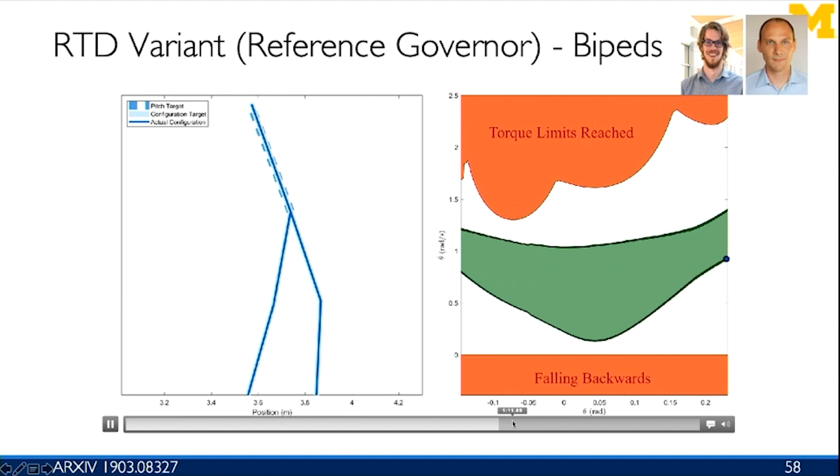Our goal now is to start translating these planar models. It's been really hard to get sums of squares and these types of optimization techniques to work for big systems, but we're slowly making progress translating these onto the types of systems that people care about—basically the work we've been pursuing in great deal in my lab.

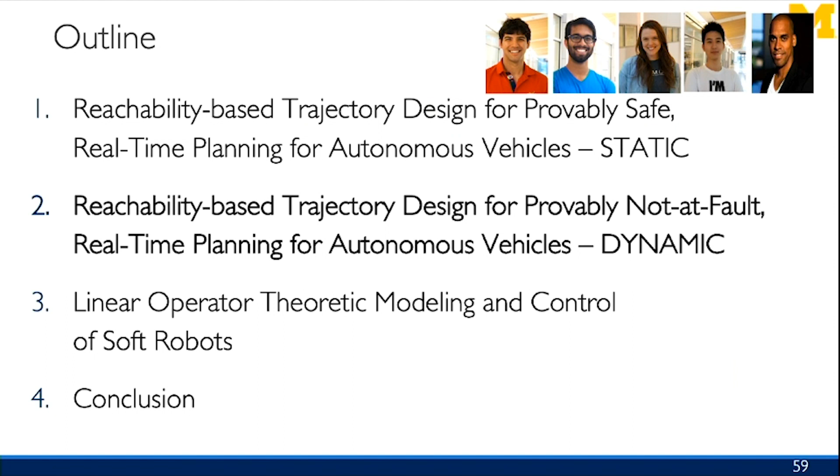We keep moving here. In just 5 minutes, I'm going to talk about how we handle dynamic obstacles, since I think people will be interested in that. So now we're back to our same world.

Now we have moving obstacles, and we certainly need to be able to say something about prediction here. We're going to assume something fairly strong: that our predictions are conservative. They don't need to be accurate—they just need to be conservative.

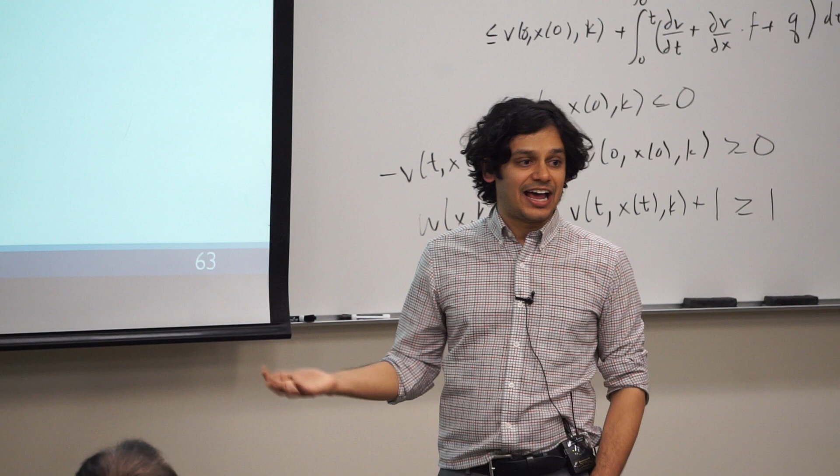Even with that prediction, we may be a parked car and someone may run into us—it's not our fault in that instance, but that can certainly happen when things are moving in the world. So we need to stop talking about safety here and start speaking about a different notion, which I'll call 'not at fault.'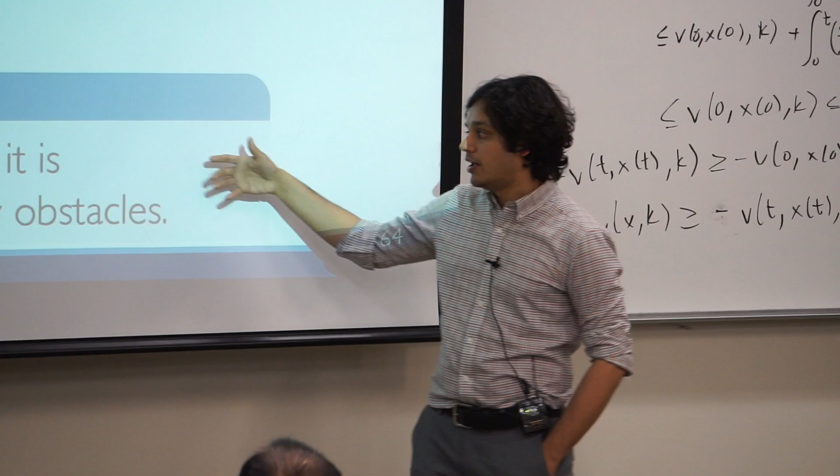In this paper, we developed this notion of not-at-fault behavior. In particular, we focused on this definition, although it can be generalized to other notions of not at fault: an autonomous vehicle is not at fault at time t if it is either stationary or not intersecting any obstacles.

Using this notion of not at fault, we try to generate trajectory parameters that are safe. Instead of using the W function, we now use the V function, which satisfies a very similar type of inequality constraint when it comes to the forward reachable set of the system.

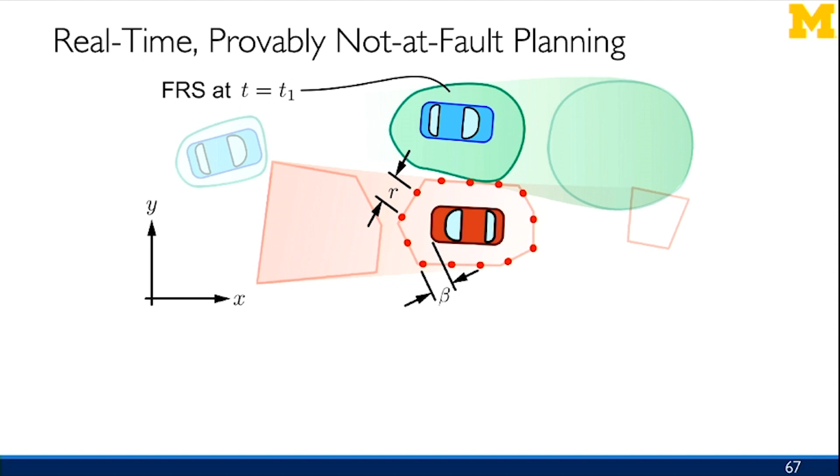We can discretize this prediction the same way we discretized earlier, to generate a representation of obstacles that ensures safety. In fact, in this paper we show how to discretize in time as well, in order to ensure not-at-fault behavior—that's described in the arXiv paper you can take a look at.

The funny thing here is we basically took this planner and said: left turns seem to be a really hard problem that people in the self-driving car space care a lot about—can we start doing left turns in a not-at-fault way? So you'll see we're taking these predictions, thinking cautiously, and executing accordingly.

And again, I like to be really mean with my robots—I'll probably be the first one who dies in the apocalypse.

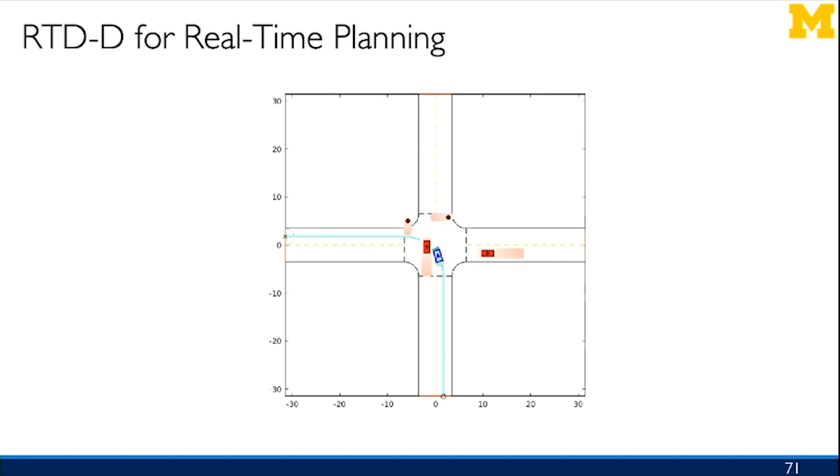You'll see now we have predictions of everything surrounding the vehicle, and you'll start seeing pedestrians coming out. And again, we do evaluations. We really believe in that in my group. Obviously, everyone does. In this instance, instead of using an RRT, we use a generalization of it called the state lattice. We see that for a variety of different platforms, we have no at-fault collisions. We can get to the goals pretty frequently. And we can get really high average peak speeds and average speeds, which is great.

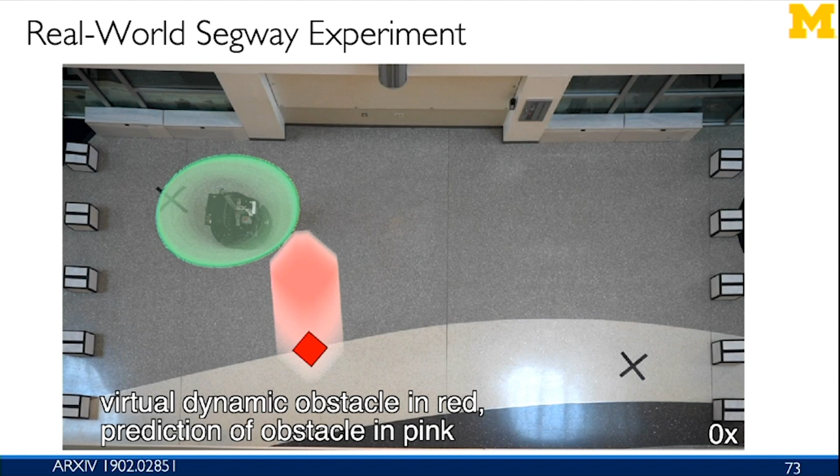So then we started doing demos up in the GG Brown building. We sat at the top and recorded our Segway platform running around in the atrium, showing that we could generate behavior in a nice way for this type of system with virtual obstacles initially. I think this video is online as well. You'll see that it can figure out how to get around these things. You're spoofing the robot into seeing the obstacles. That's right, we're spoofing the robot into seeing the obstacles. The reason we did this overhead is so that we could see it from top down.

Again, you can find this on my website. We start doing really mean things, like putting in Mario-related bad guys.

Yeah, so why is this the right definition of not-at-fault? For example, if I step in front of a moving train and then stop, technically I'm not at fault. Totally, that's a really good point.

So in fact, this definition of not-at-fault, if you created one where you incorporated the reaction time of each individual, where each element out there in the real world has a braking distance that looks this large when they follow the speed limit, and a reaction time that corresponds to this length of time, we can generalize everything I present here to that notion of not-at-fault behavior. So basically nothing really breaks here in terms of the theory. You just have to tell us what the appropriate definition of not-at-fault is. This is one to get us started, but as we move forward, we're thinking about other ones that may be more meaningful, but none of the theory changes in any grandiose way.

Then we wanted to show it worked on a vehicle. So we started doing spoofing demos again, where now all we're going to plot here is the spoofed obstacle, not the human. You'll start seeing that it can do lane-change, like overtake maneuvers and whatnot. And that's really cool. Again, these videos can be found on our website. It starts doing really cool things.

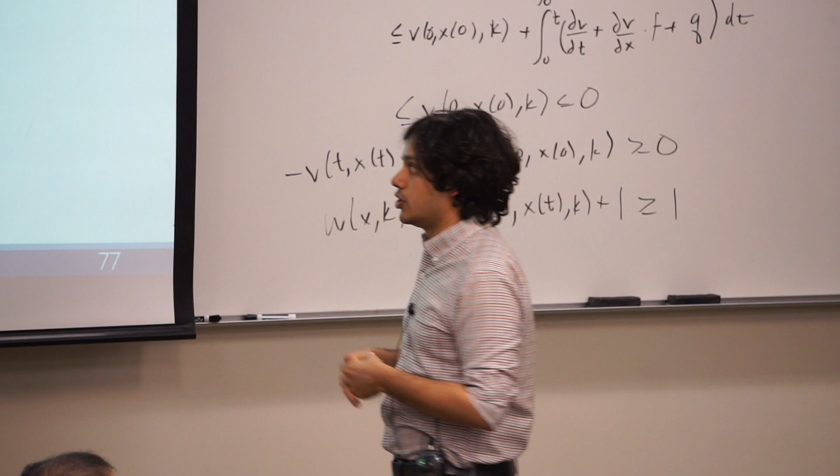As one of my students, Josh, presented this morning in his thesis defense, there are beautiful ways to also extend this to do things like globally optimal SLAM. In this instance, you can really increase the size of the problems we can solve because of the structure you have. Earlier on, we were in the 8 to 10 dimensional state space world. In this instance, we're solving SLAM problems globally optimally with hundreds of constraints, in under a minute or so. So you can really push that higher and higher, and it becomes really exciting.